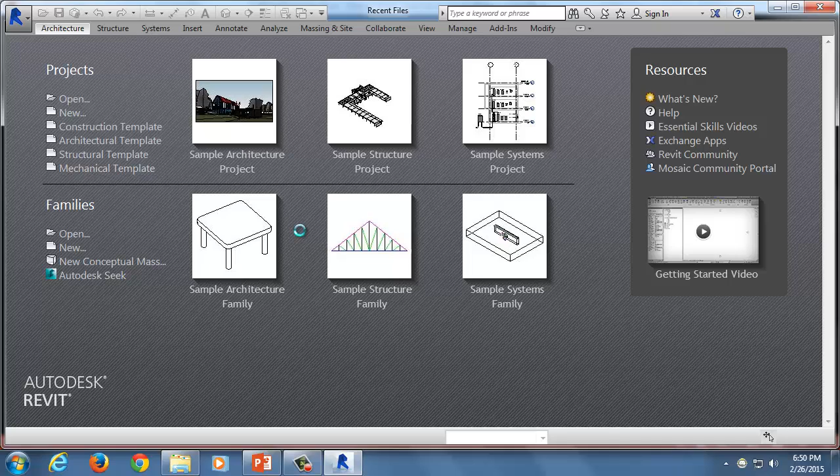So by default it's off. So if I click Detach from Central, then when I open it, it gives you this prompt. Detach and, whoops, you're supposed to do the bottom one: Detach and discard worksets, because we don't need those worksets anymore. It'll open either way, but it's just one extra thing that you don't need, and will make it open quicker. So again, not essential, but we're about being efficient, right? So that's important to note when you're opening up your Revit files.

Okay, and then once you're in Revit, you have several viewing options that you're going to have problems with again. So an architect could have on their 3D view section boxes, phasing, and also analytical model info in there that you don't necessarily want to see. And so you can change all these settings and make it a nice clean model with exactly the geometry that you want to export into Navis, and get rid of all the stuff that you don't need.

Okay? So phasing is a tool that the architect uses, so you could have, say, an existing phase. You could assign model elements to be existing, and then you can assign new construction model elements. That's commonly what phasing is used for within the model. So it could be helpful for you as an estimator to be able to differentiate those two, to take them off separately. Or maybe you just want it all together and you go from there. Sometimes they have a phase 1 and a phase 2 set up in there as well.

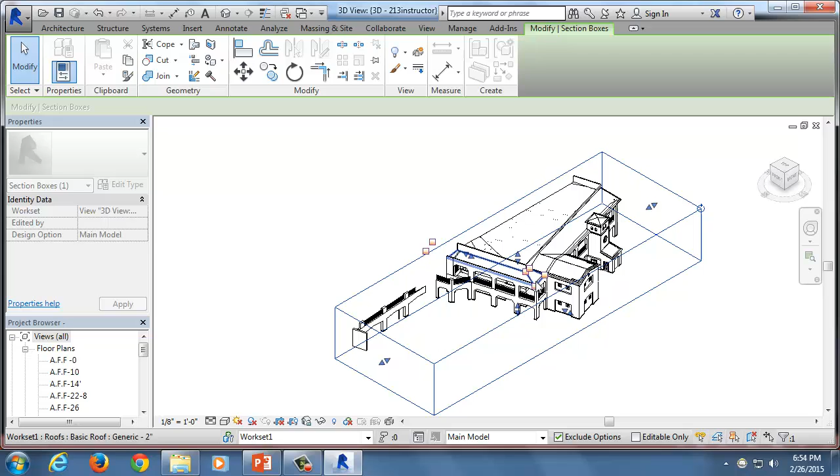Another thing is with scope boxes and selection boxes. Okay? Or sorry, section boxes. So within the Revit model, also under this Properties tab, under Extents, you can turn on section boxes. And so an architect maybe, you can have a section box here that sections down the model.

Stupid thing. Sorry.

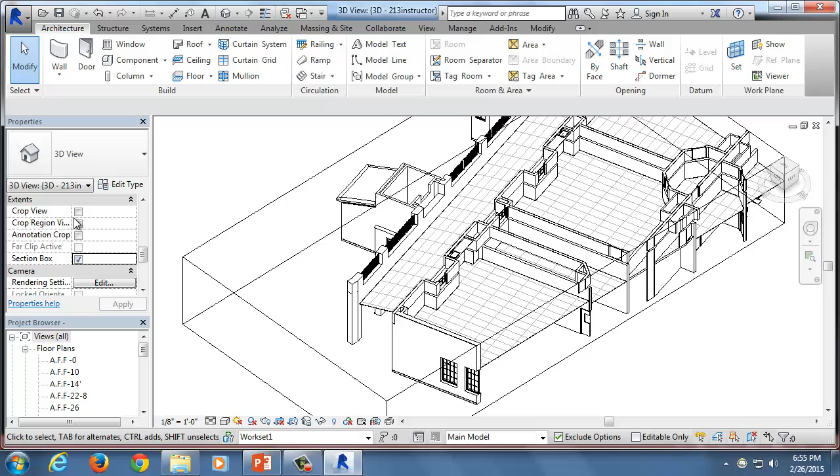Right? You can kind of get the idea that you can have a 3D view with a little section box. And so sometimes you may get a model that has this section box down, and you're like, what's going on? What's wrong here? And so in that case, you can turn off the section box under this Extents, right? So you just turn that off, and then it has no section boxes on there.

Is that also used for grid lines? Not necessarily, no. It's more for if the architect has set up a 3D view for like a rendering in the plan. And so you want to show just the curtain wall. They want to get rid of everything else around it and just show like one corner of the wall. You do a section box, put that on a sheet.

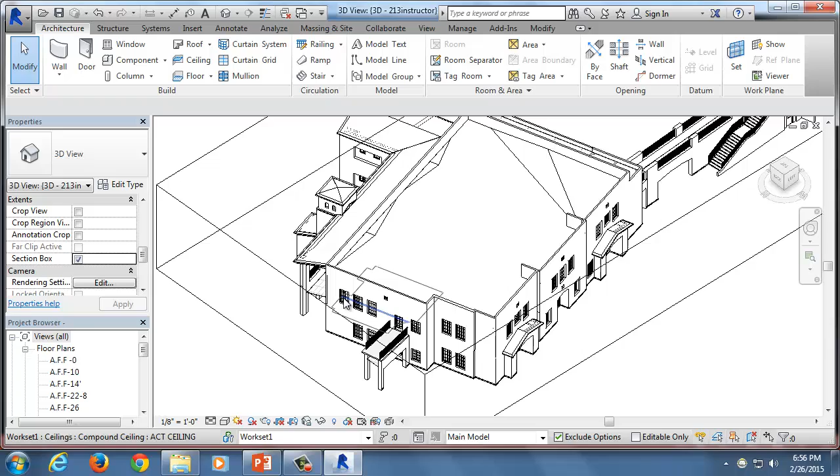Can you use that for like details of what you're finishing? Is that what it is? Like when it's coming through the blueprint, there's pieces of the front, or I don't know, they have to redraw it or they take a part of that. Yeah, for like an elevation view or detail view. So they don't have to redraw it. It would just be referencing a part of the model. But this would be like for an orthographic rendering, something like that, where they want to show in 3D on the plan. So they'd section down the 3D model and then place that little picture on the plan.

And also, see how this box is showing? You can also make it so this box doesn't show, but it's still sectioned down, right? So, for instance, if I have this sectioned down and I don't want to see this box around it, you can change that in the visibility and graphics settings. Okay? And so again, that's going to be this window right here.

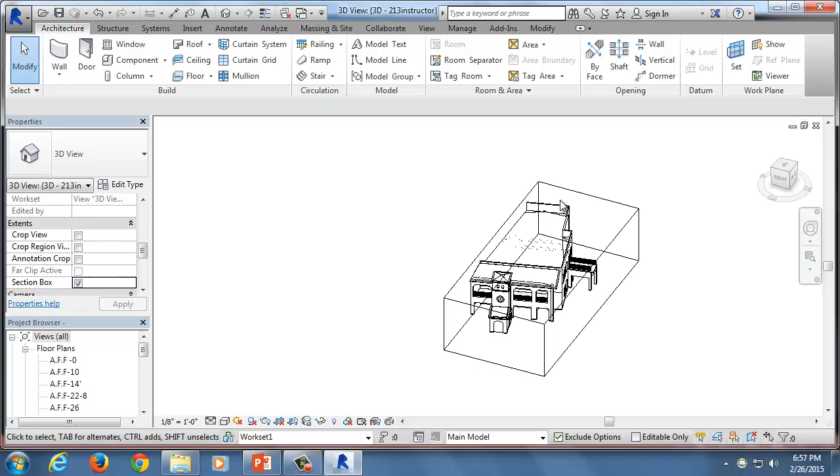If I would like to make a couple sections and save it here, how can I do that? So now this section I would like to save it. Do you like to save how it's kind of modeled down? Yeah, where we used to save the section here on the bottom, on the left bottom. Can we do that? Yeah, so down here, see how there's 3D views here?

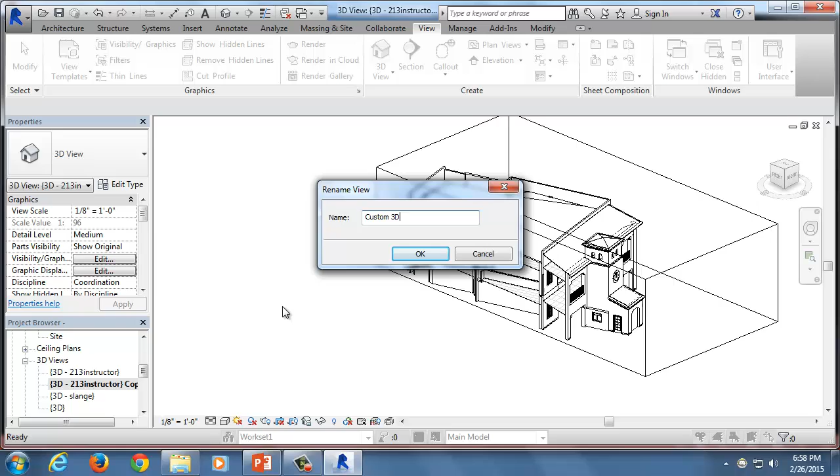And so you can, I know you can save the view, and I apologize, I don't save it very often. So I believe you can, if I duplicated this and then I can rename it, so now if I were to come just to my normal 3D view, then I can jump back to my custom 3D view that has all the settings how I want it.

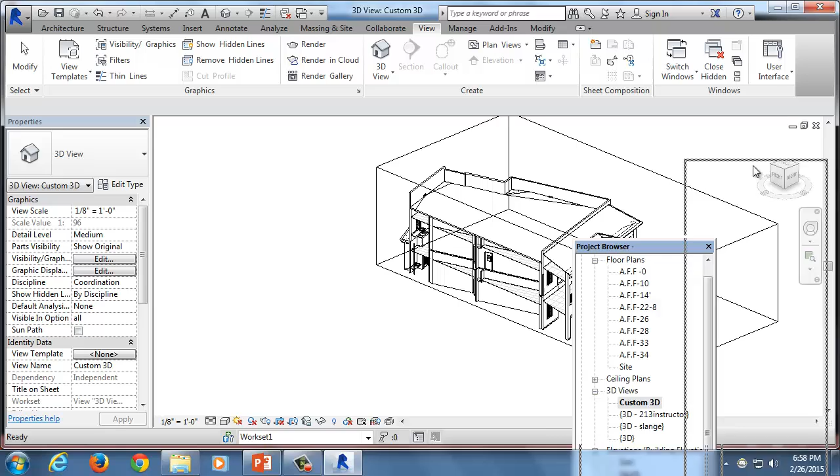So yeah, in the project browser, I like it over here. It's not. It's a struggle.

So yeah, so if you wanted to export out just a portion that you just need to estimate for, and you wanted to kind of have two NWCs, this is one way that you could do that. And so like I was saying, you can make it so this box either is here or isn't here, as well as a bunch of other items like the analytical model, if it's showing up and you don't want it to. You do that under visibility and graphics. So it's under view and visibility graphics, or the shortcut is VV.

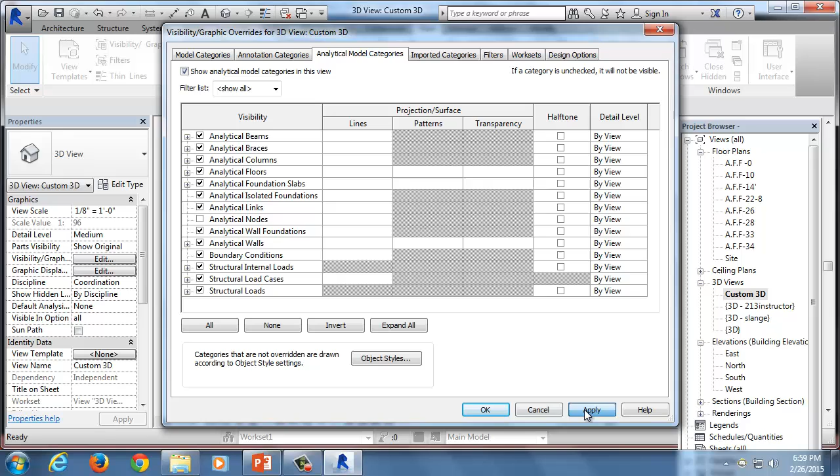Okay? And so that comes up to the visibility and graphics overrides. You have model categories, annotation, analytical model, and notice it's all turned off. So if I turned this on and then applied it, that will show any analytical models that are there. Under model categories, you could turn off just all your ceilings. You could turn off all your roofs. You could turn off portions that you don't want to see.

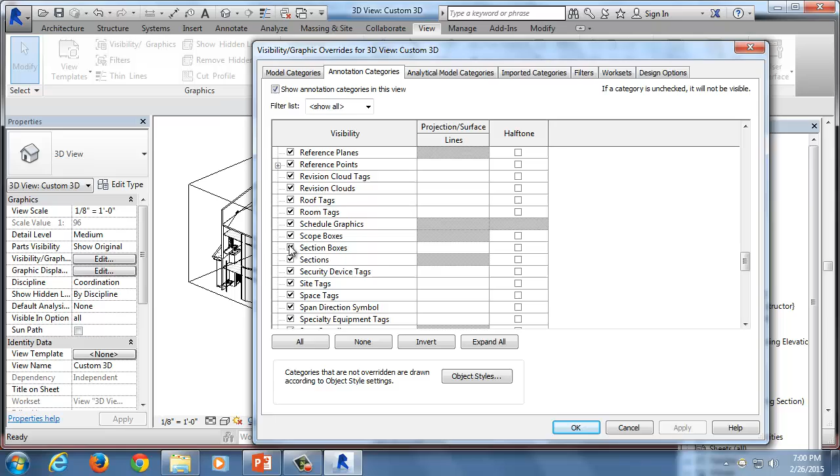And again, everything that you see on your 3D view when you export, that's what shows up in Navis. So if it's hidden, it's not going to show up in Navis. Does that make sense? So if you want to piece it out and then append them all into one, you can in Navisworks. So, for instance, if you come down to the S's, I always make sure that my scope boxes and section boxes, they're under annotation categories. So under annotation, scope boxes and section boxes. Those are two things that I always make sure are off when I'm exporting anything from Revit.

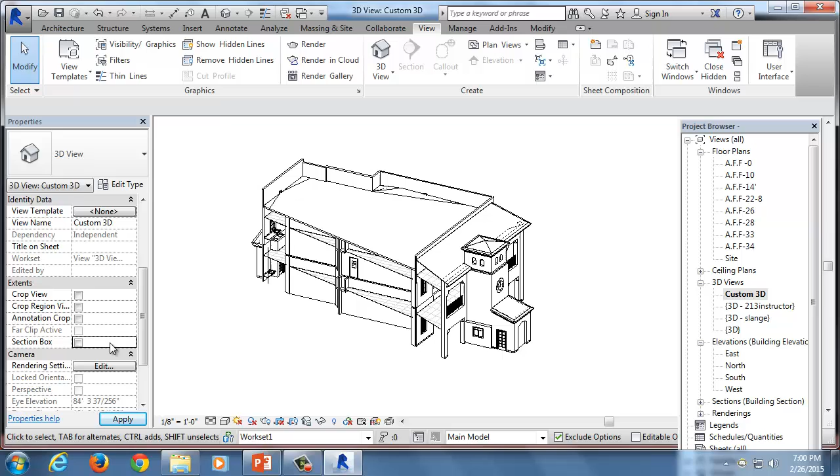And so if I hit apply. Why? Because it looks ugly. And so usually I'm not going to have a section box, so I'm going to uncheck that here so I get the full model. And then a lot of times when you have a scope box on, around every single main item a box, kind of like how our section box looked, would show up around it. And so that just gets annoying to me, and so that's when I just go VV, I go to my annotation, I turn off my scope boxes. And I'll show you on another model where that becomes more annoying.

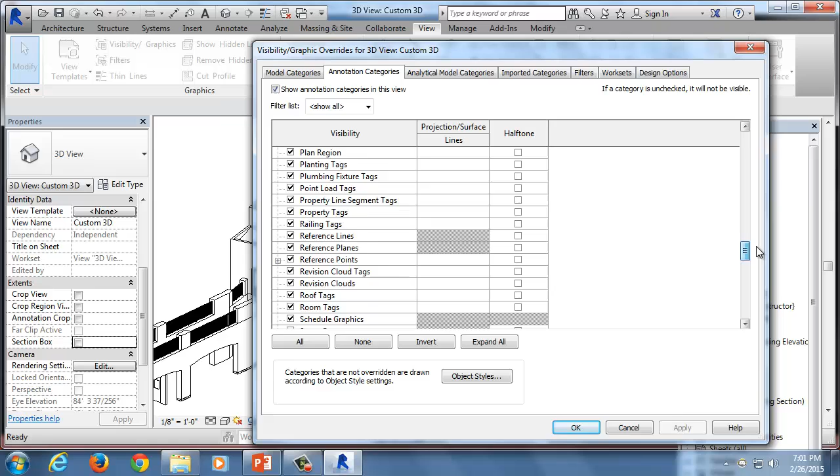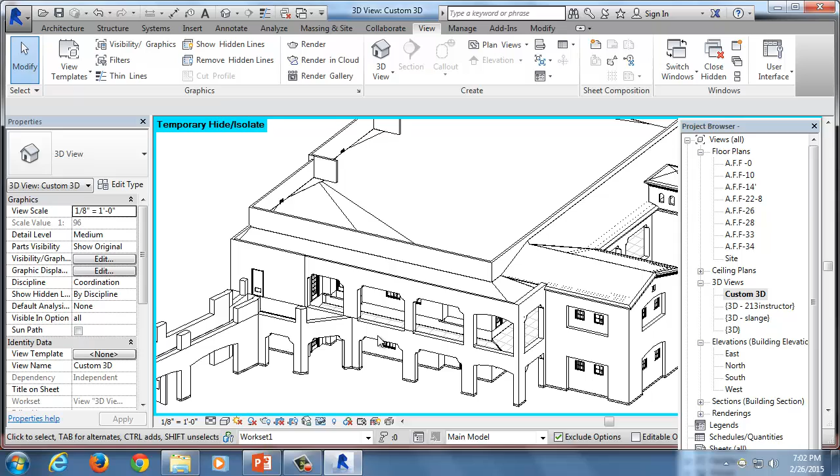So, like I said, I usually go under the annotation categories and make sure my scope boxes and section boxes are not visible, and then I turn off any section boxes within the extents category of my properties menu.

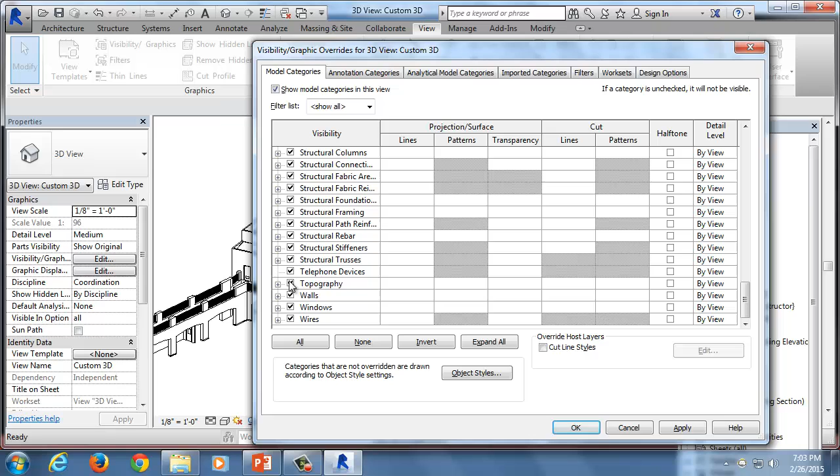And then sometimes you'll get a model that has site or topo with it. In that case, I don't want to have my topo in my export to Navis. So I just go VV, go under model categories, and there's one for site and one for topo. I could turn off my site and my topography, and then you'd be left with just your building. If you wanted the topo, you could have just the topo and turn everything else off.

Are you using VG, VV, or VB? Yeah, two V's, and I think VG also does it. There's two shortcuts for it. VV's quick, it's just boom boom, the two letters right away.

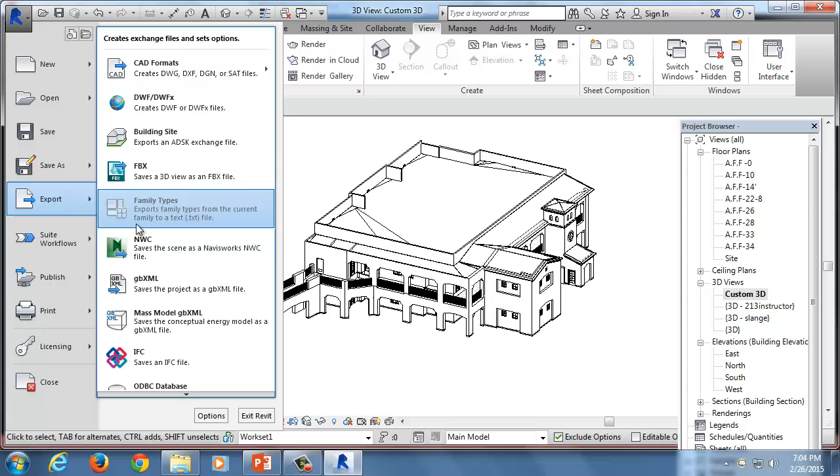So once you get your model how you like it, you need to export it to an NWC. There's a few options that you can change during your export that affect how it's organized. So if we come into Revit, you have to be in the 3D view that you want, with everything how we want it right now. Export to an NWC. And it pulls up, if you click this Navisworks settings, that's where you can choose a few different settings.

The main one you're going to want to look at is whether or not this is divided into levels. You've seen on some of the NWCs I've had you do for homework, there's been, in the model tree, a level 1, a level 2, a level 3, and a roof level, and it's split out. Sometimes it's kind of annoying, because you have walls and all of them, you've got to find them all. But other times it's good because that's a quick or easy way to separate your takeoffs by level, so you could have a different item in your quantification workbook for each level.

So depending on how you want to do your takeoffs, you can either divide it into levels or not. Everything else I always keep as default. You could try messing around with those, but that's the only one that I ever deal with.

And then also you could change here, if you wanted to just do the entire project no matter what view you're on, there's an option to do that. If you just wanted to export your selection, you could do that. I recommend just doing always the current view - make the view how you want it, then export the whole view.

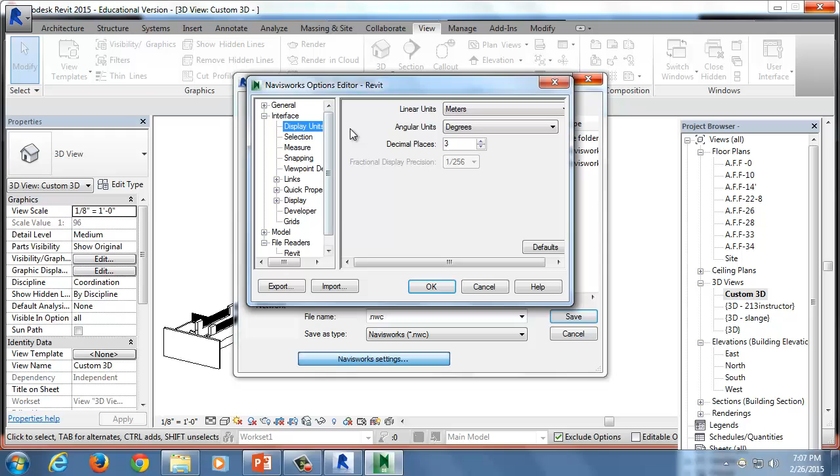That makes sense, because it's showing there the tree on the left that shows the interface. Right here, the properties. No, in the options editor. So you're saying, over to the left, up there, the interface? Yeah. Oh, display unit. Right, yeah, it would. That's probably - you're right, you probably want to keep it all in the correct units before you export it. I believe though it may just do it for you when it comes into Navisworks, but I think you're right, you'd probably want to just do it in. I was going to look for decimal feet, but it looks like it's just feet.

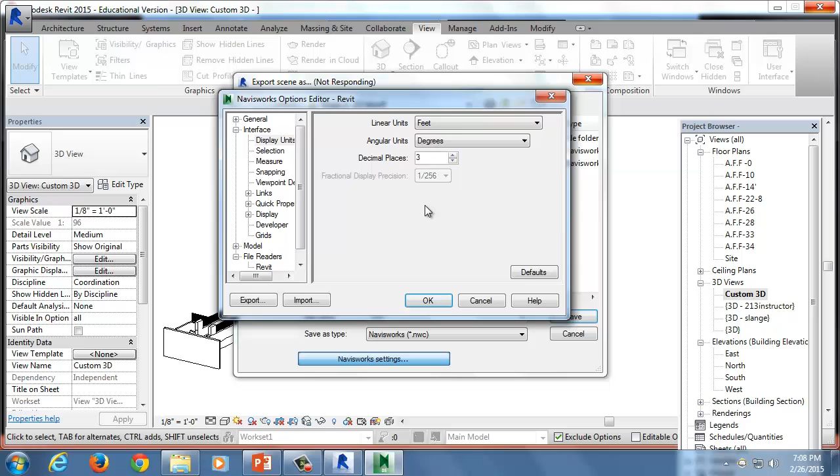Correct, so that would be good practice to make sure your display units are correct. So again, come in here and you can divide it into levels or not, and then you have your NWC. So I'll just go ahead and divide it into levels, and then I'll also do one that's a scope box and not divided into levels, and you can kind of see the difference.

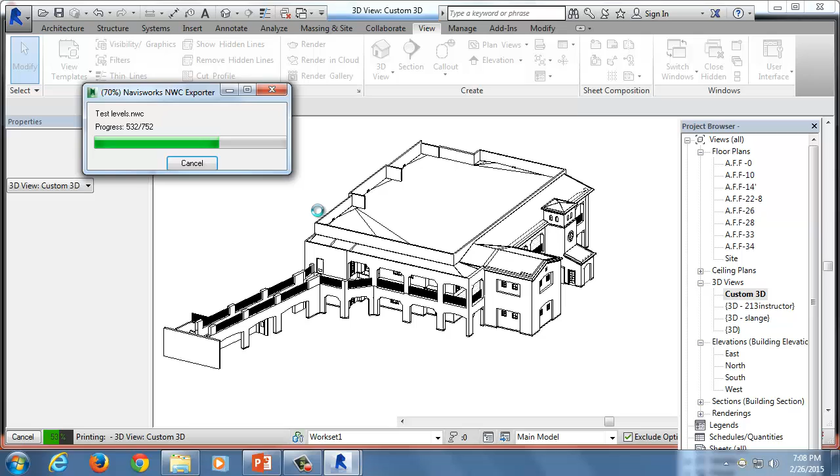Section box, I apologize. Remember I made it so you can't see it, so that's why I turned it on. So I go VV, annotation, section boxes. Okay, now I can see my section box.

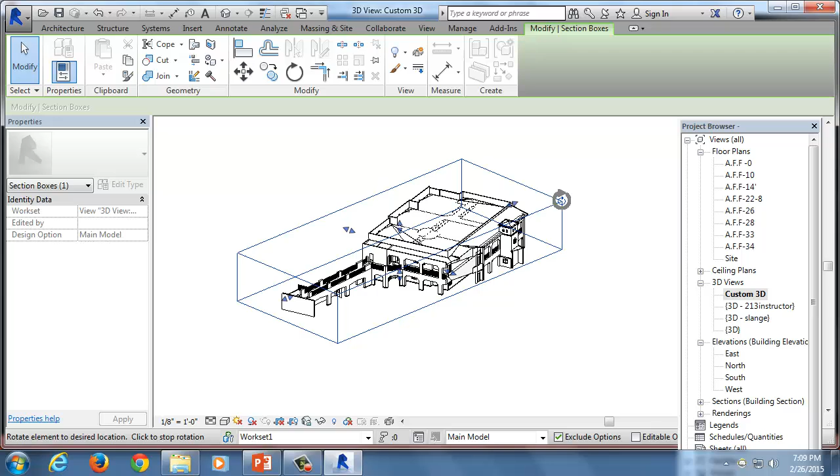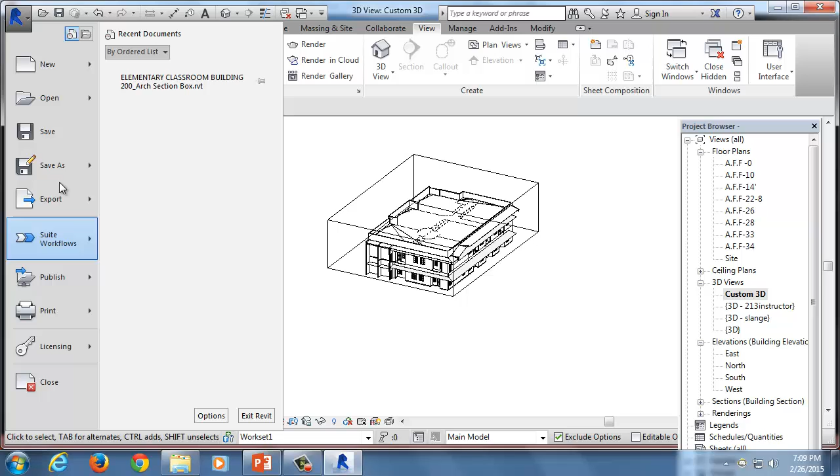So if I wanted to have - if I didn't want to have this bridgeway in there - I could make it so I just want to export this. I don't believe it will, but we're going to find out. So this one I'm going to change to not divide into levels.

And then we'll see the differences. So again, depending on how you want your takeoff done, you have a lot of flexibility in the way your Navisworks model is organized. And that all happens with how you export it from Revit.

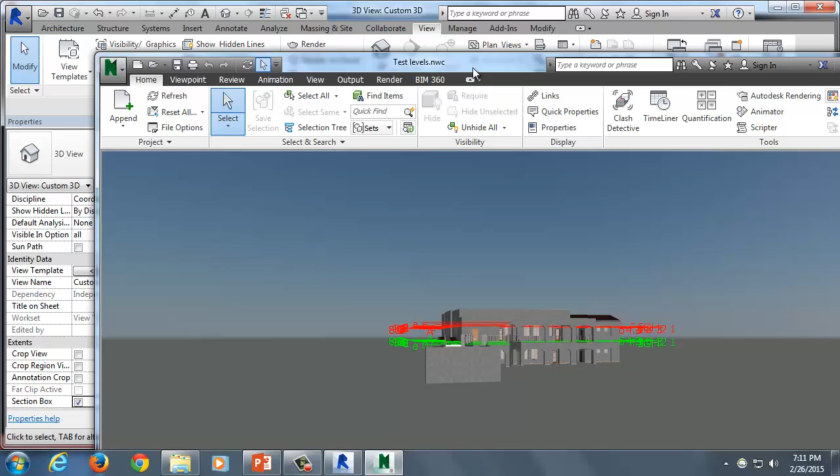So you could export each level as a separate model. I don't know why you'd want to do that, because you already have the ability to break it out by levels in Navis. But if you wanted to do half of a building, you could export that first and then export the other half, so your model tree has the quantities separated the way you like.

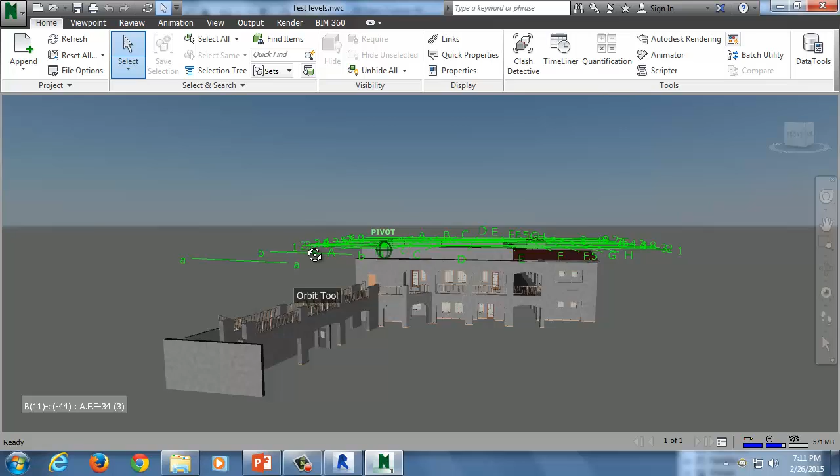Is there a benefit to doing that? Why would you choose to do that if you were just working on a certain area of the building? A lot of times I'll need to break out my estimate by core and shell, exterior improvements, and then I'll have a couple phases within the building. Phase 1, phase 2. So if it's like a remodel, phase 1 is all of level 1 and part of level 2. Phase 2 is the other half of level 2, and then it moves on.

So if it was segmented nicely in geometric terms, this would work great. This half is phase 1 - I'll export that. The other half is phase 2 - I'll export that. That way I don't have to click through saying 'oh, just these walls are phase 1' and drag that into my quantification. I can just say everything in my model tree from the first phase, I know that's all in that phase.

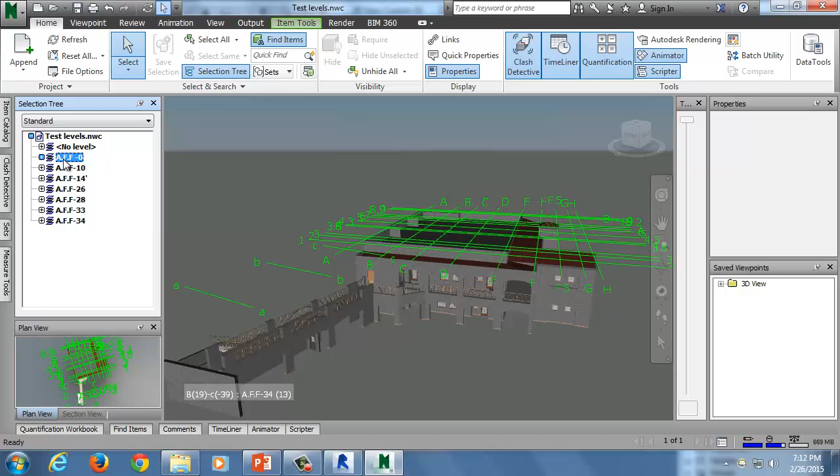So actually, let's just load this. That's the wrong one. So if we open this up, we see I have all the different levels that were created in Revit have come through. Within each one, you can see what's a part of it. Some of them may or may not even have geometry associated, but whatever levels are associated in the model show up here.

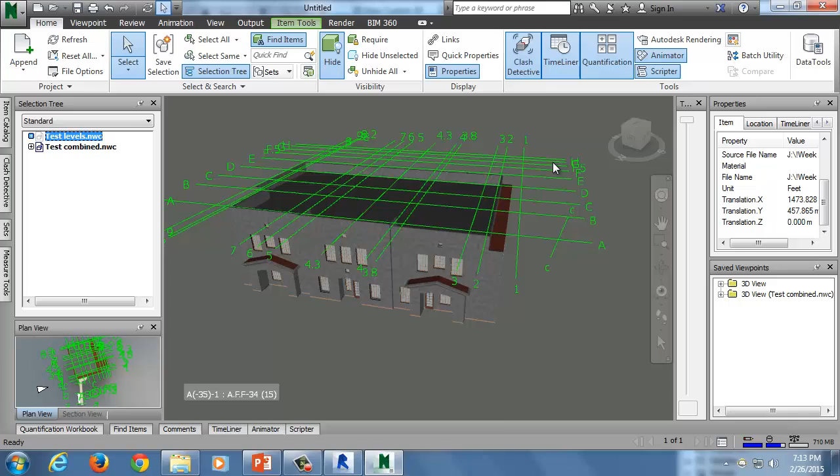So now let's go ahead and append in my other test combined, and I can have them both in here, and I'll hide the test levels by clicking hide. And so you see that now it's just that geometry, right? That my section box cuts down, so it doesn't have this portion.

And when I open this up, it's not split up into levels. So it's about how you think about what your deliverable is for your estimate, and then make sure you set up Navisworks the right way to achieve that deliverable the easiest way. If you just need to know everything that's in there, I would not separate by levels - export it and you have it all there. It's very simple, all the floors are usually in here. Sometimes generic models have all sorts of things. But does that make sense? That's an important thing to know how to do.

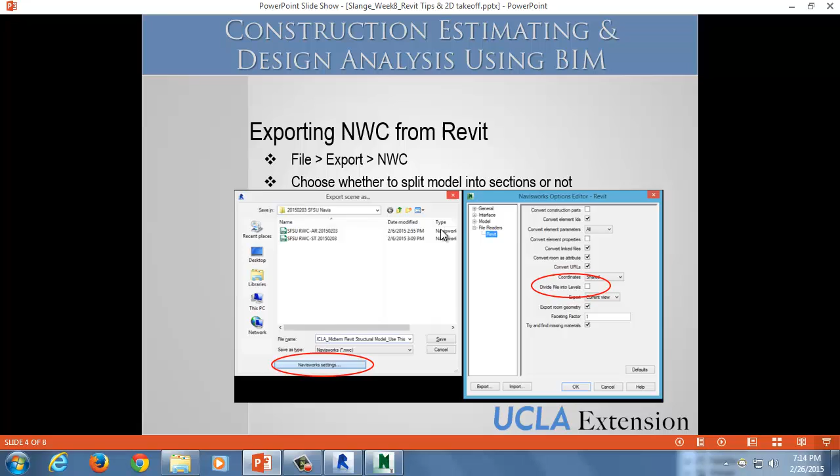Okay, so I'm going to show you guys how to use the DWF file format. DWF is more of a universal file format, and several other programs can read a DWF. Sometimes it's more of a snapshot in time - it's a read-only file, can't be edited, similar to an NWD. But the cool thing about a DWF is that it can have both 2D and 3D, so it can be a model and also have 2D sheets associated with it.

The downside is if you pull a DWF into Navisworks, it's going to have not as much detail in that model tree. So if you're doing takeoffs by pulling from the model tree, it may be more difficult - you might have to do more search sets or actually pick from the model and drag it in. But if you want this functionality, or if you only have a DWF, you can still use it. It's pretty simple - you just go File, Export, and then a DWF.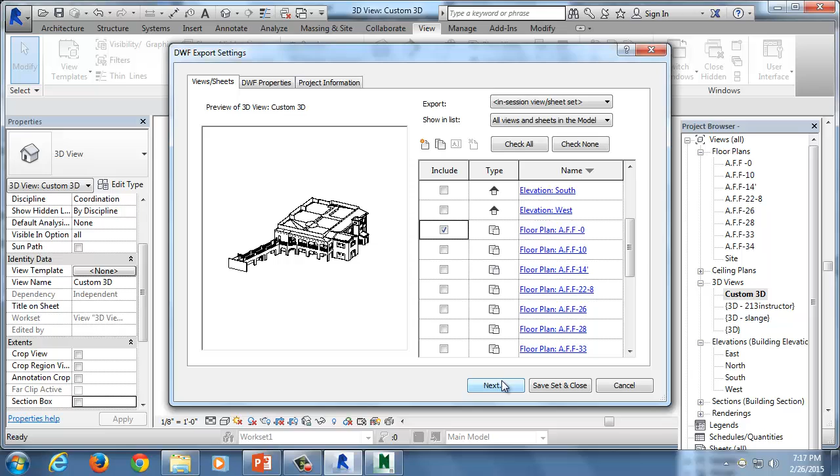So that'll show everything that's here in your project browser, every sheet the architect has made. So I can choose my regular 3D view, and then find my floor plan, the one at elevation 0. So I just want one floor plan and one 3D view. And then I'll go ahead and save it.

Okay, and then you'll see when I open this, I'm going to actually append it in again, so I'll have all three on here.

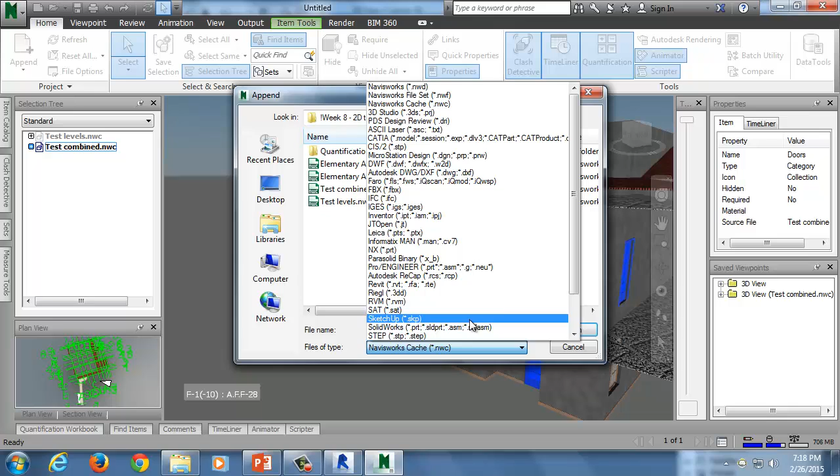I'm going to say look for all files. So there's my DW - nope, that's not the one I just did. I want this one. Yes, I want to add the additional ones in.

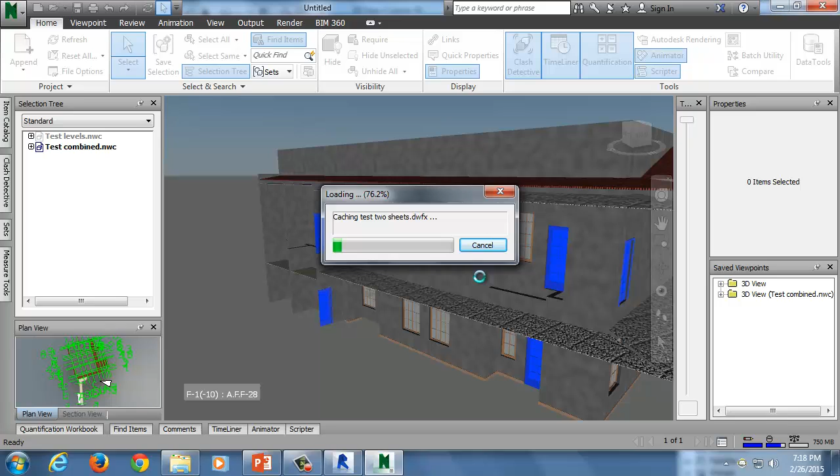So I'm going to hide my old one again. So now you see - there it is. Looks like it got put in a different coordinate somewhere else. So there it is - see how it looks a little different, but it's the same geometry.

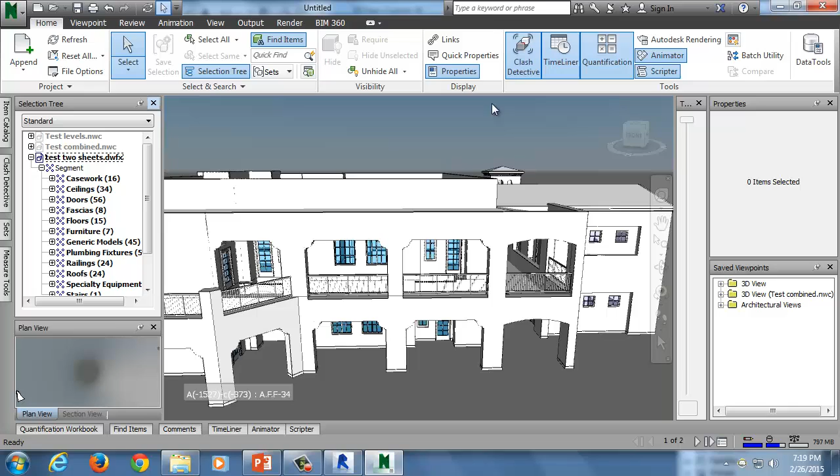If you open up your project browser, and we'll go over this more when we practice together, you can see here's the model, and then here's the floor plan. So it's loaded in this sheet here.

So you can reference both 2D sheets within Navis, and if you notice, if I click on items of this wall, it shows up in my model tree, so they kind of talk to each other. If I take something off in the 3D DWF, it's going to show up as colored and taken off here in my 2D.

So that's only for embedded visualization when you are doing the estimate? Yeah, so it can be that - it can just be being able to look at a floor plan. Sometimes it's just if I want to take off something from the floor plan, it's easier to do a one-time takeoff if it's not modeled.

I can just come in here and draw like carpet, for instance, and come in and draw an area of carpet that I want, and that'll show up in my quantification workbook. So it's a way that if not everything's modeled, you can still do it the old-fashioned way, but keep it all in the same system, instead of using on-screen takeoff and Navis separately.

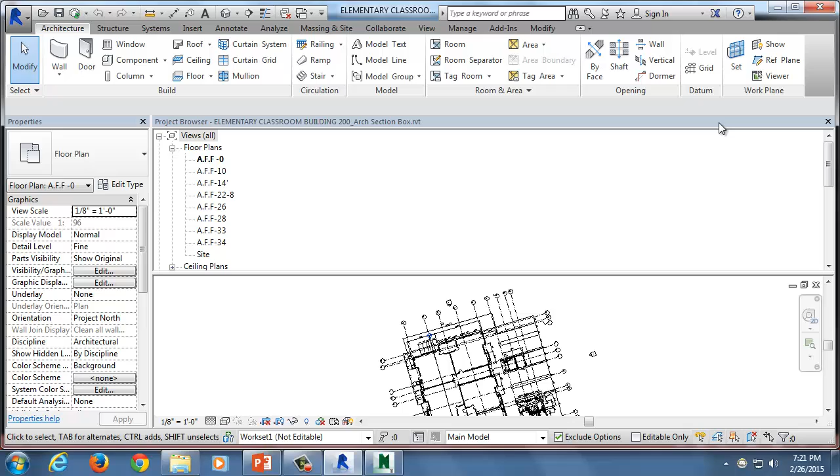So because I already have it open, it won't even let me. Is it opened yet? Yeah. Oh, good.

So you got all those errors, and it's saying yada yada yada - it's got issues, local central file. So now close it, and then try opening just from the Revit.

So you have Revit here, then you click Open. You click on the file and then detach from Central. And then you want to detach and discard work sets.

So we don't really care about the work sets. Where is that? On the desktop, the actual file? Yeah, so it's under the shortcut to student data, and then my folder Stuart Lang, and then week 8, and elementary classroom.

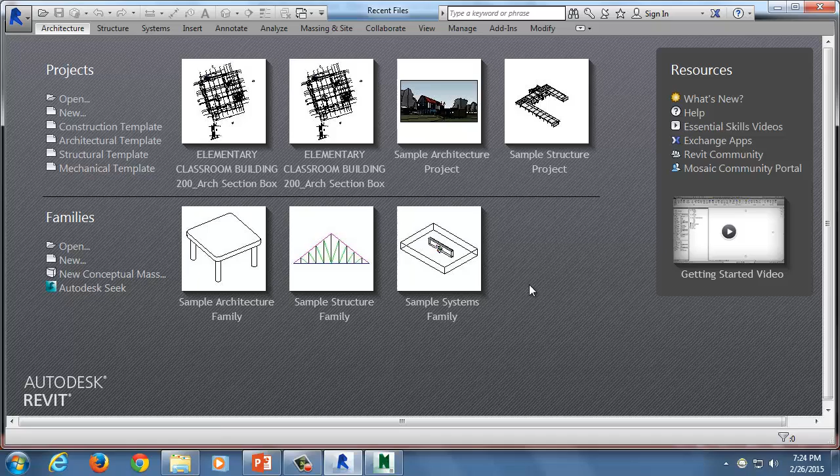So yeah, so then open, detach, because sometimes you'll get a file and it just takes forever to open up, and it's just annoying.

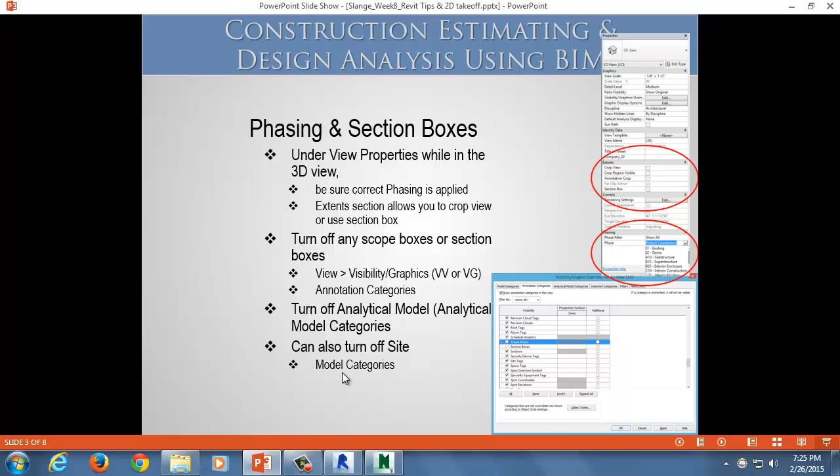Okay, and then I'll just open the same one, detach, and now let's go ahead and change your visibility settings. I tried to make it so that it came up with the section box on, but I found out when you detach from the central, that goes away.

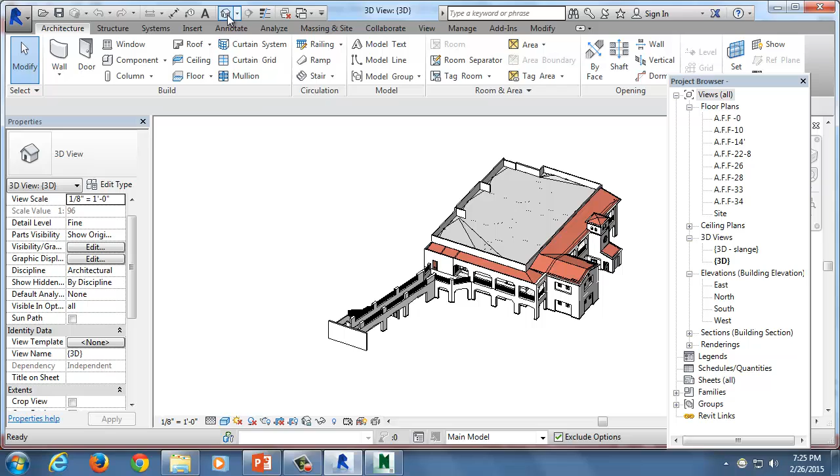So it's going to try and throw you guys off, but try turning on and off your section box, and to do that, you can't do that in the 2D view it came up in - you have to go to the 3D view. So that brings up the model, and then you can go to Extents over here in the Properties tab.

And you can turn on the section box. And there's also all these other things that could be on or off. But the section box, if you wanted to section something down, if you click on it, you see all the different arrows in the different directions. And that's how you would change what's sectioned. You can also drag this corner to rotate it.

Go to Visibility and Graphics. Yeah. Sure. It's under Extents. So over here, you can see you can check on the section box. And like I said, sometimes you'll open up a model and either nothing will be there or it'll just be part of it. So you need to turn off that section box to be able to see the whole model.

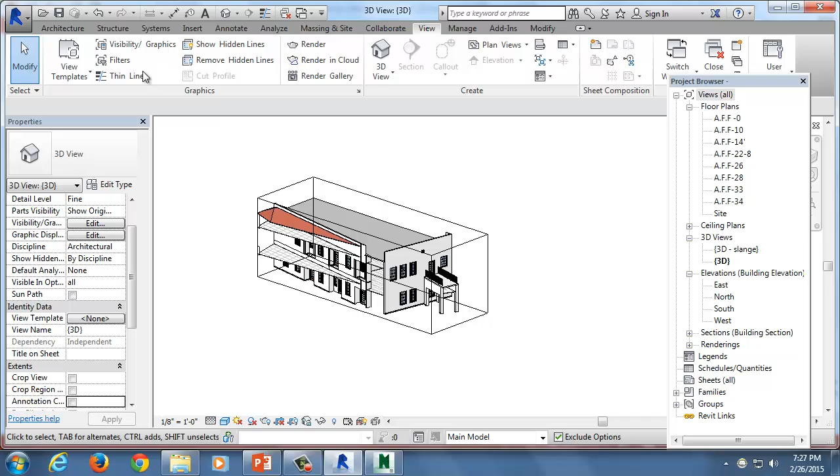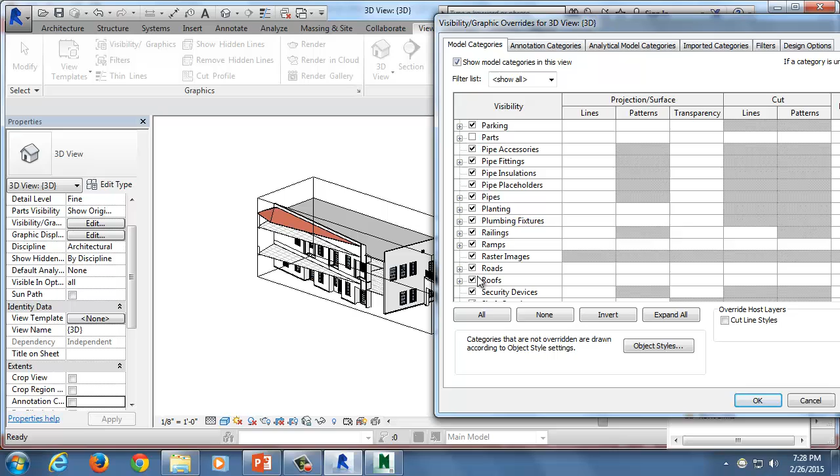And so then again, VV to get to your visibility and graphics overrides, or do it the old way under View, Visibility Graphics. And then try turning off some of the visibility of some items and then applying it. So for instance, we can turn off all of the ceilings, doors, and roofs. And hit Apply. And now our model is just walls and windows.

So if you had a model that had a bunch of furniture and it's all just for show, pictures and pretty, and you didn't want any of that to muck up your estimate and your takeoff, just turn them off and export it without the furniture. So you have a lot of flexibility in the way that you can have your model show up.

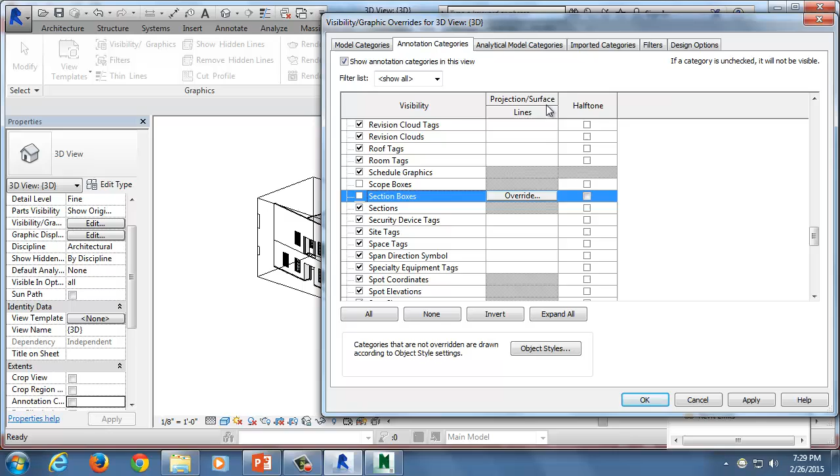Go ahead and go down to the annotation categories and then turn off scope boxes and section boxes. And hit apply. And that's more just for visibility, just so it doesn't get hard to see what's going on.

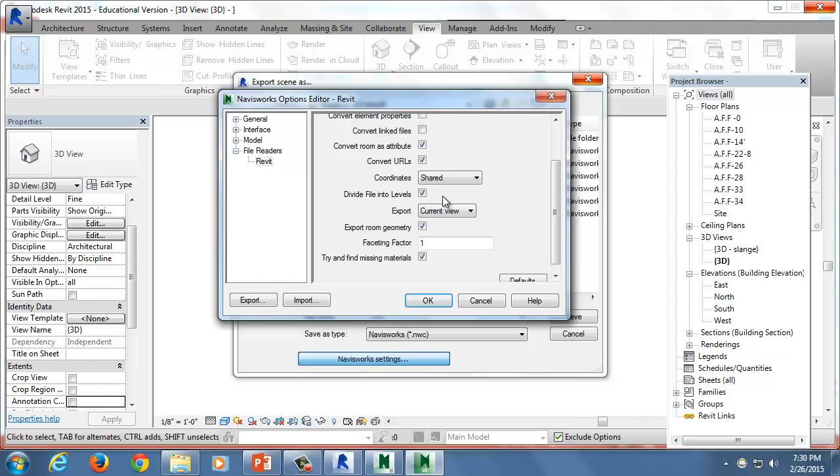And then once you get it sectioned down, let's go ahead and export it and split it into levels. So to do that, File, Export, NWC. And then when you're in the dialog box, you click Navisworks Settings. And then you can change this to divide file into levels. Hit OK. And then go ahead and save it somewhere on your Z drive.

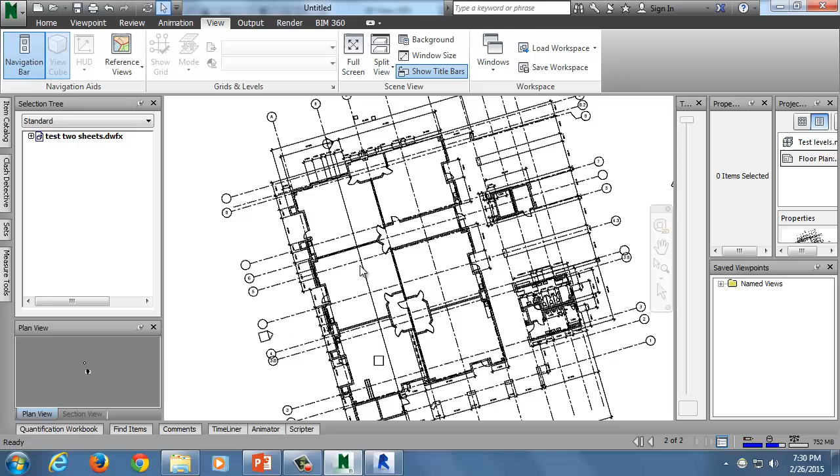You said we have to make sure it's in the right units, right? Oh, we were going to check that, see how it came through. But I did change it, didn't I? I changed it into feet. So, yeah, because I always thought that it was able to go both ways. Because when you set up quantification, you set it up in imperial. You could choose metric or imperial. So I think the logic is in there, either way you export it.

So again, how you open the 2D? Sure. Yeah, so you have to make sure your project browser is visible, and that's under View, Windows. And then the very bottom is Project Browser.

So for the Navisworks setting, we don't need to change anything on ports? Yeah, so it's just changing if you want to divide it into levels or not. So I was saying we should change it to yes, divide into levels. I don't know what's default. I think default is not. It was checked. It was checked? Okay, so the default is to divide into levels. So you don't need to change anything in this case. You can just verify though.

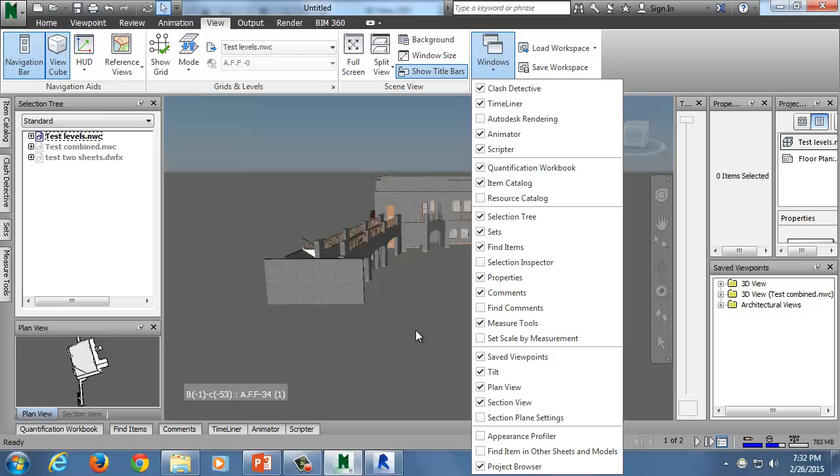Can you show again when you go to that project? Oh, yeah. So to get the project browser, I go to View, and then Windows, and Project Browser. Oh, and that's in Navis. I wonder why you couldn't find it, huh? And so that brings up your project browser, which shows you all the different models and sheets that are in your open file.

Okay. Guys all got to this point where you have a model that's split into levels.

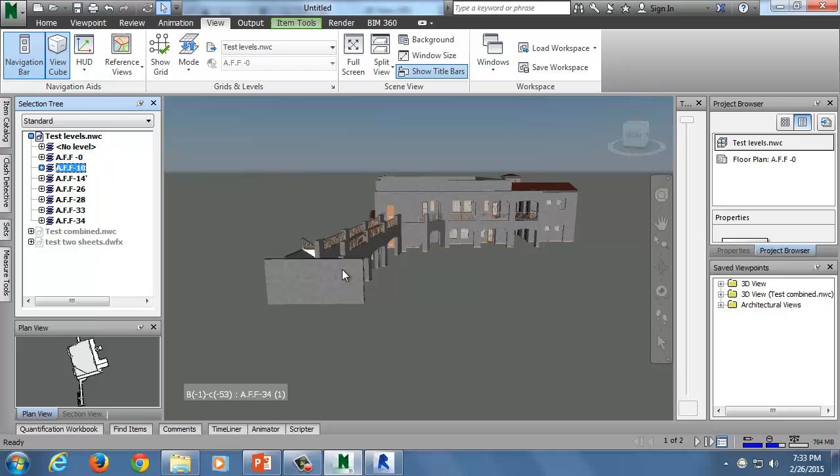If you notice, what's missing here? Yeah, floor's missing. So, a couple ways you can get around this. We need to take off the floor, right? We need to have that. And so you can either draw the floor in Revit and then export it. That would be one way to do it. Just draw it in, and that way you can get the volume, the perimeter, and the area all just pop from the model.

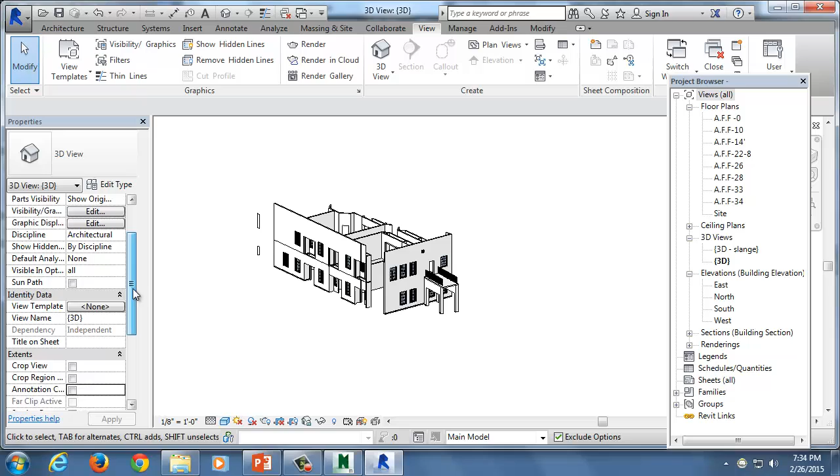Or you can do a 2D takeoff. So I'm going to turn everything back on. And so if I wanted to draw in the floor, I'd go to one of my floor plans. That's probably the easiest way. So go to my above finished floor, that's what AFF is, right? So AFF 0, so that's my 0 level. And I can draw in a floor. Go to architectural, floor, and I can change, I want this to be a 6-inch floor.

And I'm going to pick lines. I'll let everyone get there. You guys can do this as well. So go to in Revit, the AFF 0 floor plan. Oh, we're in Revit. Yeah. So this happens sometimes. If something's missing in the model, we can fix it. That's the beauty of having the Revit license, is you can do anything that the architect could do.

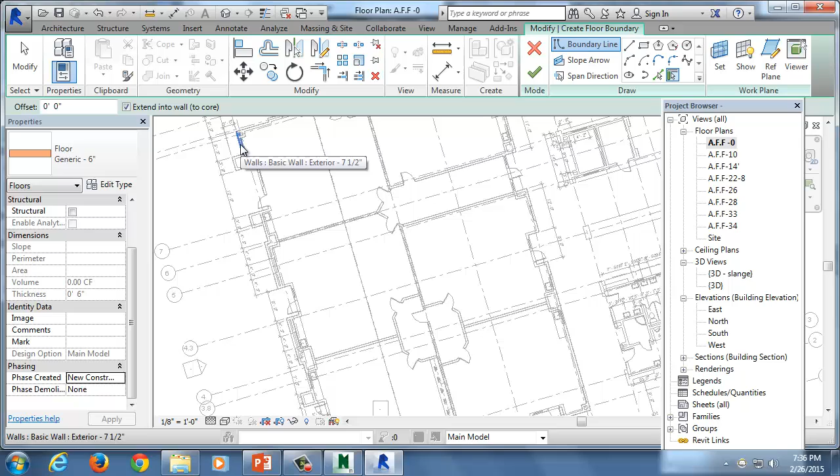And so I'm actually going to do pick walls. I think that might be easier. So you can do it by just drawing your own line, or you can say pick an actual line that's there. But I'm going to say pick the walls, because that's going to be the easiest. So then you can just kind of pick the walls, go around the building. This is a pretty in and out building, so it's kind of annoying.

So I'm just kind of going through. And if things don't totally line up right now, don't worry. We can join them after, like if there's a little corner that you can't get all the way connected. Oops. So once you get it pretty much all the way around,

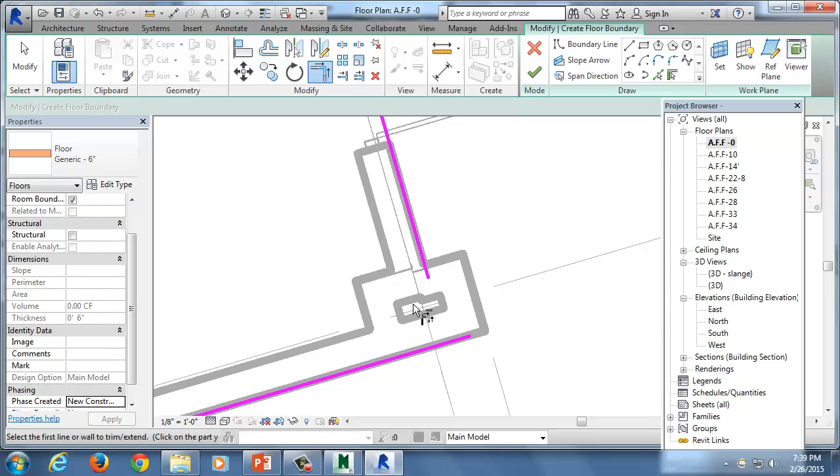So I'm going to trim this together. Trim that. It's close enough. This, I need to choose another part of the wall. Looks like I missed one. Here. If I hit the delete button, it puts it in delete mode, so it looks like I had an extra line here that I don't want. Click that so I delete it.

How's everybody doing? Slow and steady wins the race? You guys getting it?

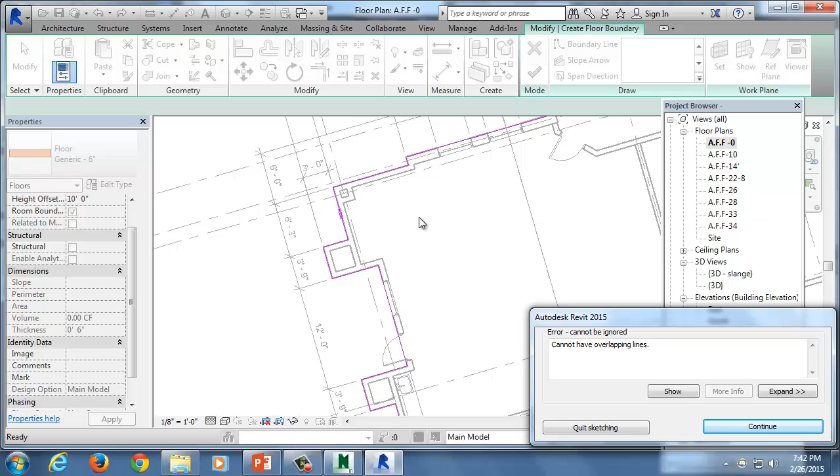So when you click on it, if you click the modify and you click on it, you can change whether it's the inside or outside of the wall. So I'm going to go make sure I'm on the outside of the wall for everything. So again, I go to modify, and then I click on the line I want to change, and then it gives me that double arrow. So here's one. Yeah, we want to be outside of all the walls. Oh, here's another one I forgot. Cannot have overlapping lines. So there. Sure, so if you click modify and then click one, you either hit delete on your keyboard, or right here is the delete.

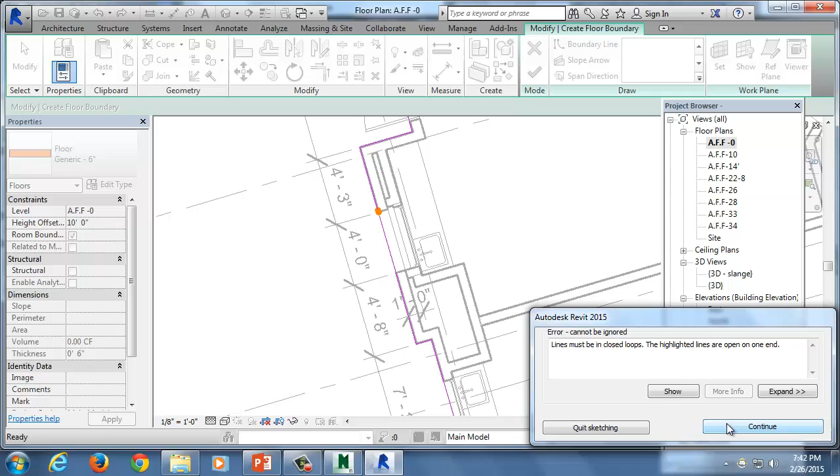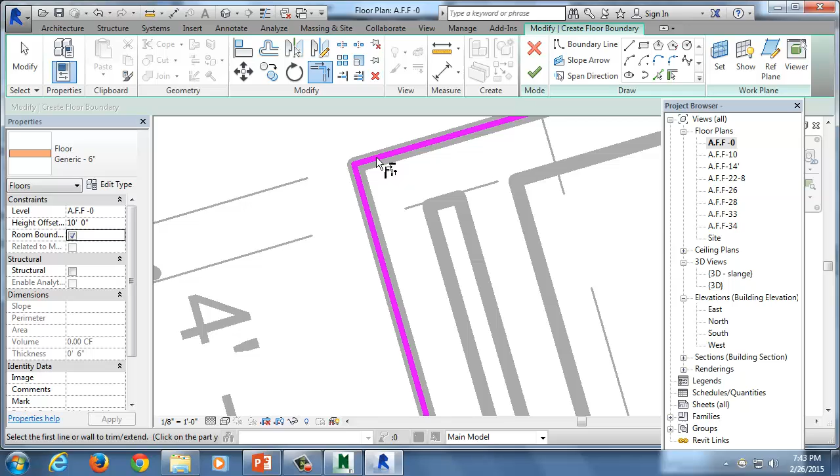Even if they're not really connecting, will it still create a full floor, or do all the lines have to connect at a perfect angle in order to calculate the floor? They have to connect. You can't finish the floor until everything's connected. So that's why you just use this trim tool, and if it's overlapping, or if it stops short here, you could just click on these two and it'll join them both. And then there's trim and extend if you would just want one element to be pushed to another one.

So now I've got my floor. I hit the checkbox, the green checkbox for finish. And if you have anything that's not connected, it'll alert you. You'll have to fix it. Right here. Then it'll ask you if you want to join, merge to the geometry, and say yes.

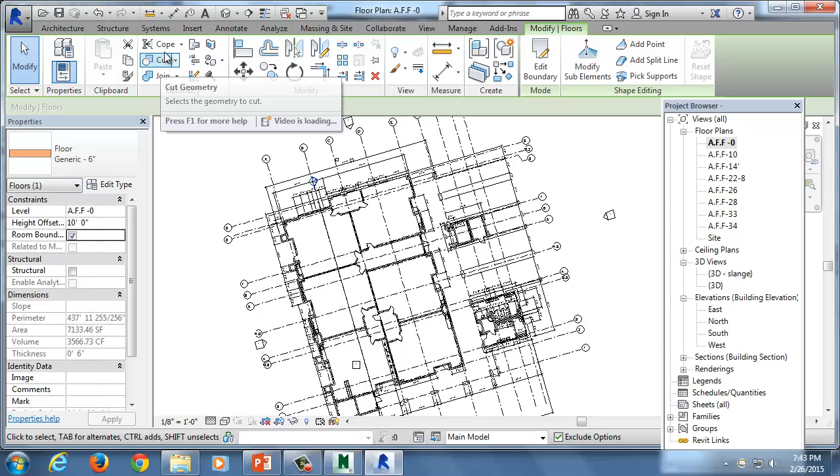If you look, my floor's still not there. So something I did wrong. And if you look at this line right here, there's my floor. Well, you did it on the first floor. Yeah, I did it. Well, let's look at it. So let's look at the floor, and I'm going to hit WT, and that tiles out my windows, right? So I can have both open at the same time.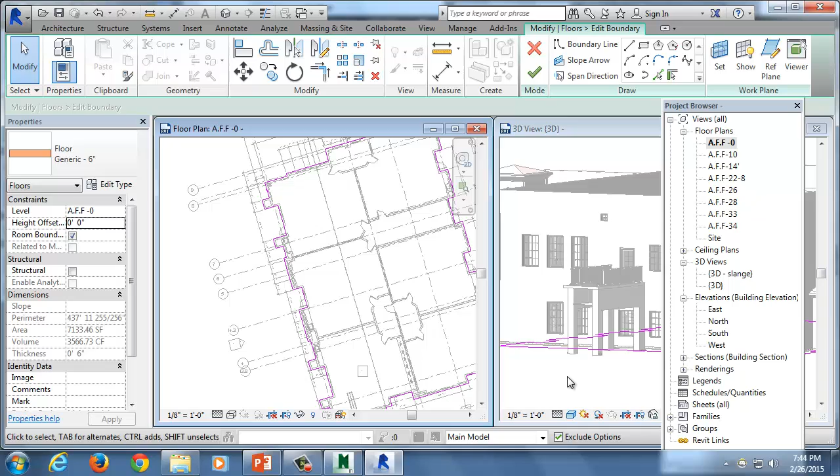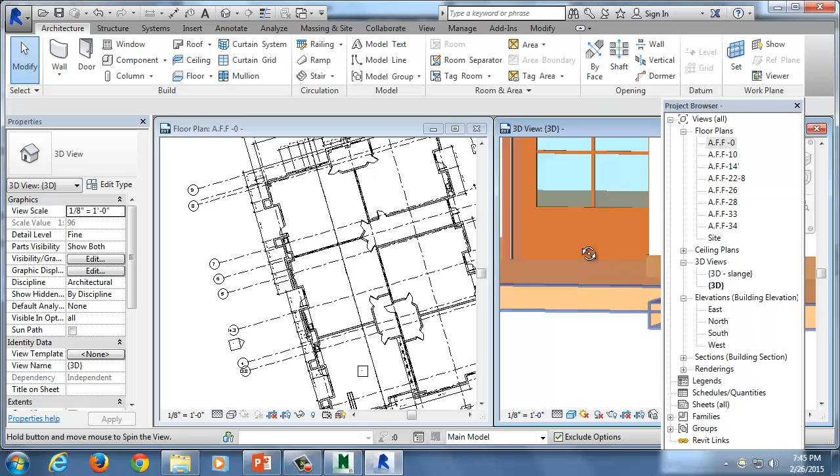And if I click on that, yep. So I can put that to 0. And now I'll finish, and I can look, and there's my floor. So now at least it's going to come through in my model, and it looks like there's still kind of a gap, but if we exported that, now you'd have a model, an element that you can get quantity off of.

So that's a little tedious, right? So you have to weigh out, okay, is it worth it for me to go through and model this? Or can I just do a 2D takeoff in Navis based off of the floor plan? So again, you just kind of have to weigh some of these things out.

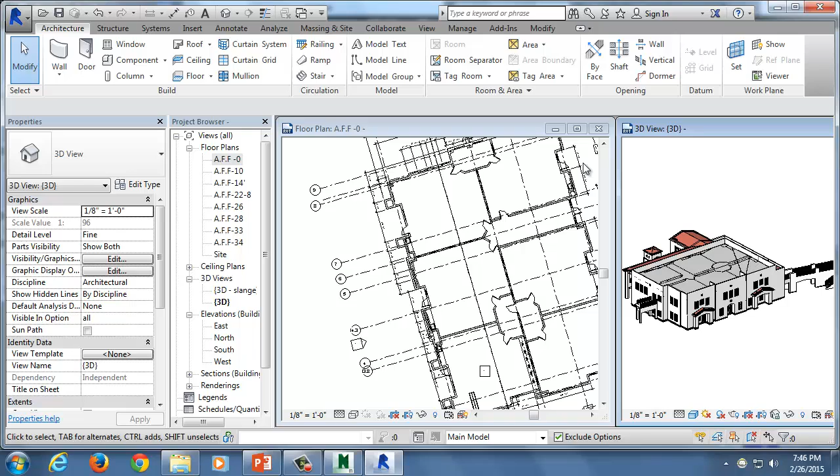I don't know why this isn't letting me dock this. Now it docks, but it's over here. Okay.

Was everyone able to finish their floor? It's still connecting all the corners. So you're in the trim mode, so it needs to connect two corners. It can't do two parallel lines. So select this wall. That looks like it trimmed it for you. And now on this one, you go to trim, and then click these two.

It needs to then move to the outside of the wall. So if you modify, click on this one. Now click on that arrow. Now hit trim and click on these two, because there's really two and they're not totally connected now.

Yeah, so you need to finish it. So it's just showing the boundary box right now. So if you click it, so it looks like, let's say show. So you have some that are intersecting each other. Close. So now it should show you there we have two intersections. So yeah, so say continue. Now trim.

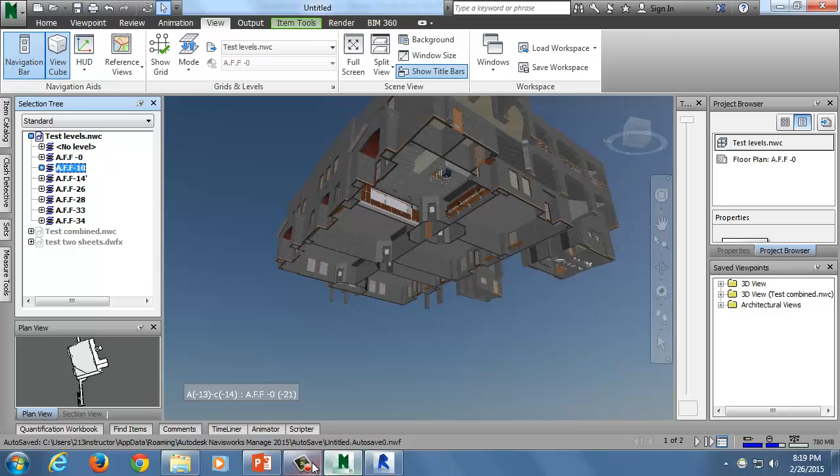But we're going to start a new file, and I'm going to have you guys do this with me. Well, actually, no, I'll just do it and then we'll do it together after. So I'm going to go in the quantification data set that you did for your homework, and I'm going to open up the architectural model, MOB, medical office building. And I'm going to bring in a PDF.

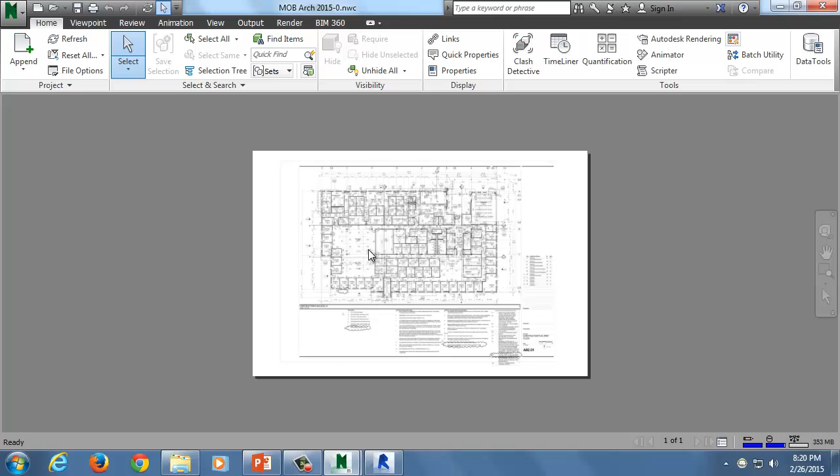Whoa. Does this already have it in here? I thought I was opening the one without. So, it changed it again. It's annoying not working on your own machine. Turn on the project browser. This is weird. Okay, I'm going to close out of this. Close out of all these. Okay, I'm going to try this one now. Ignore all.

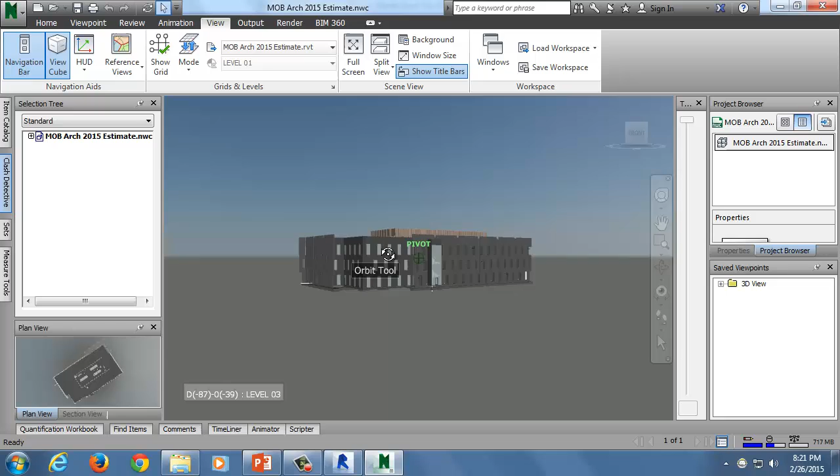Okay. So there's my model, right? It's familiar. And I want to be able to look at the floor plan on this and be able to make some takeoffs from the floor plan. So, in particular, floor coverings are something that isn't typically modeled. Sometimes it is, but like you have your slab and your floor structure, but maybe the carpet isn't modeled. So if I wanted to do my takeoff of my carpet and keep it all in the same export, when I export my quantification workbook, I can still do that.

So I come here to my project browser. Again, View, Windows, Project Browser, and I can add a new, import a sheet or model. So I'm going to import, and I'm going to look for my PDF. And it's going to be under the quantification data set. And here's the floor plan. All right.

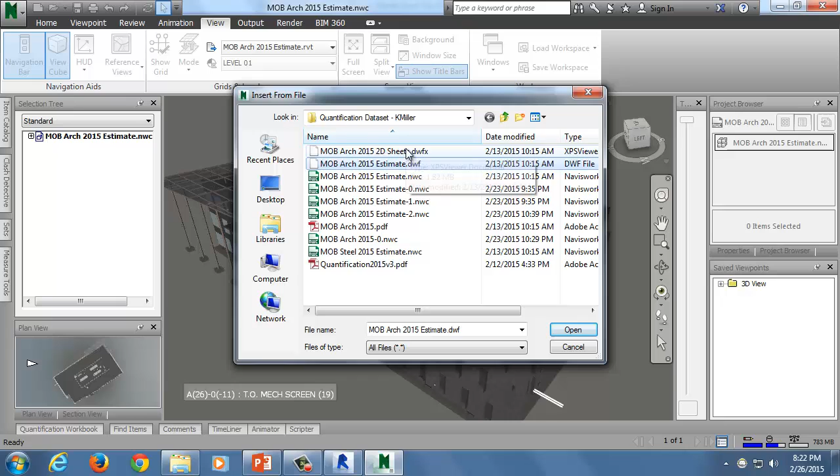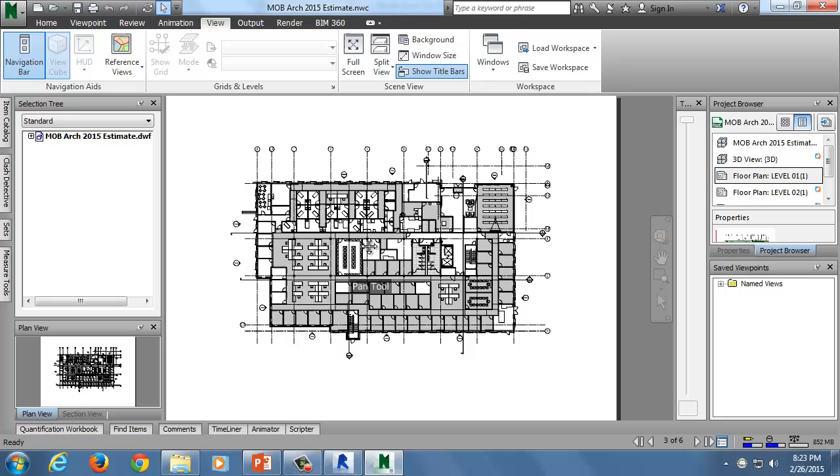So let's first do the DWF, and then I'll show you how to do the PDF. I apologize. So here's the 2D sheets. Sorry, this is the one I want. The DWF. I double click on it, now I have my 2D sheet, right? And so if I have my quantification workbook open, I'll do 48 imperial, change this to cubic yards.

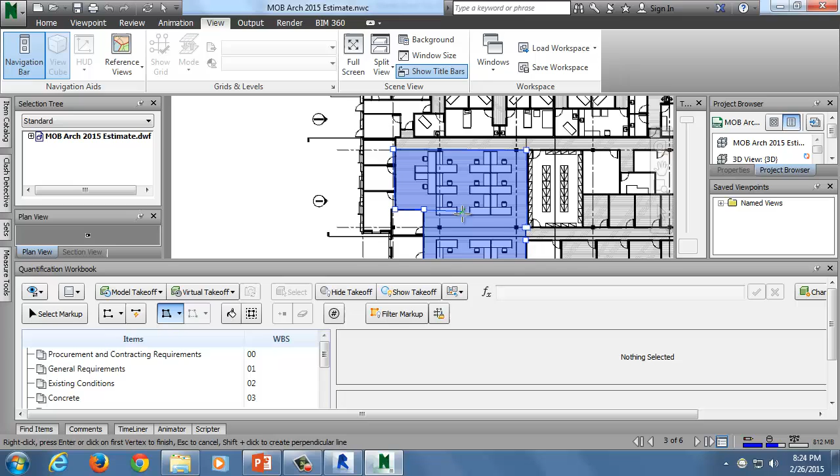And I can come here and do a takeoff of my floor. So for instance, if I want to do this flooring here in this classroom, I can use the area tool and I can start my takeoff. And it snaps to walls and lines, so I can be fairly accurate. And then once you're finished with it, you right-click to finish it.

Okay? And so now you notice here, I've got my new item that has an area of 2,425 square feet. So the DWF is already scaled. It's already in WBS 09.1. So I took it off. Since I didn't choose one before, it just went to a new item by itself.

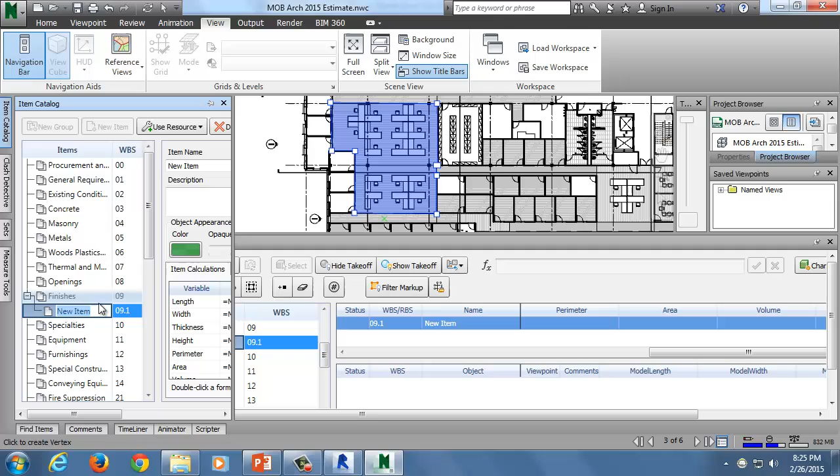I could have either made an item in my item catalog, under finishes, new item, and called it floor 1. And so now, for instance, I'll just go ahead and add another area, and this will be this room.

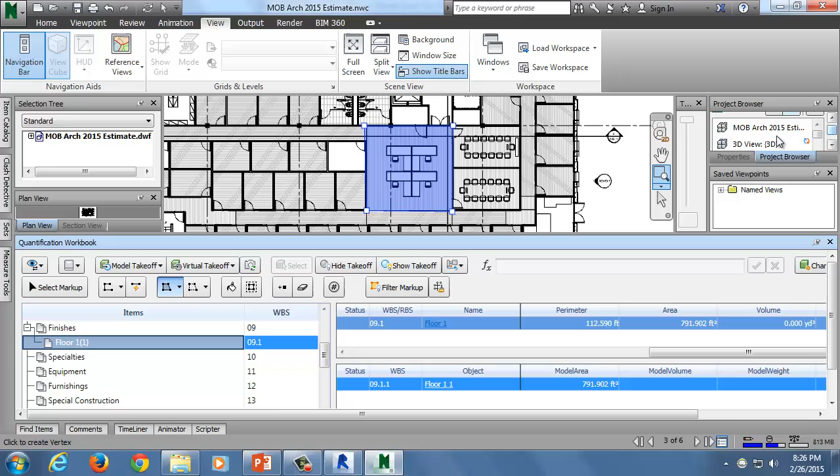Right click, and now I added it right to this floor 1. And then you have your area, 791 square feet. And then if you want to jump back to your model, you can, with my teeny little windows here.

So it's a way to be able to, again, just keep it all in one place. Maybe you find this a little clunky and you'd just rather get everything you can from the model and then use your other software for 2D. You can totally do that as well. But if you wanted to have the option to do both, you totally can.

Something to note as well, oh my goodness, come on, is that when you bring in a PDF, the DWF, it brings in everything in that file by default. So if you have a PDF that's 600 pages and you bring it in, it's going to bring in every page all the way down. So maybe you don't need that. Maybe you just bring in the floor plans. Maybe you just bring in the elevations. You'd have to separate those in their own files.

Okay. So any questions on that? I mean, just kind of showing the basic concept. You can do 2D takeoff from your 3D model when you pull in 2D sheets.

So in order to be able to use PDFs, you have to download a plugin, and it's shown on the tutorial of quantification. And so if you follow this link, and you sign in, if you have your Autodesk account, you can get this PDF reader onto your machine. So it may have problems on this machine, so we'll find out right now. But on your home ones, definitely that's the way that you can get this plugin on your version.